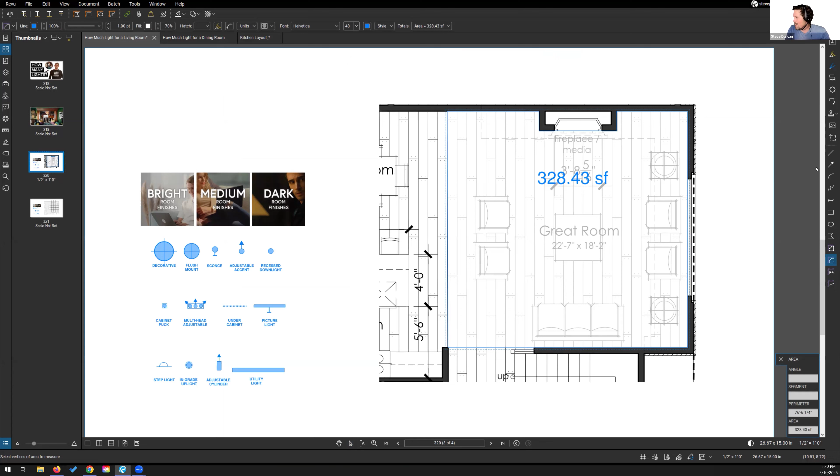So the first thing we're going to need to figure out is the square footage. So let's grab that. Okay, so we're at 328, and then we're going to have medium finishes for the paint and the wood and the ceiling in this room. Most living rooms kind of fall in this medium category. And then we're going to have 12-foot ceilings. That's something else that we need to know for our calculator. So let's head on back.

So we're already on living room. We said 328 for the square footage. 12 feet. So higher ceilings require more lights. We already have medium finishes, so we'll leave that the same. And then this light is 1,290 lumens. So let's see what 3 lights would get us to. So I think based on the layout, let's start with that.

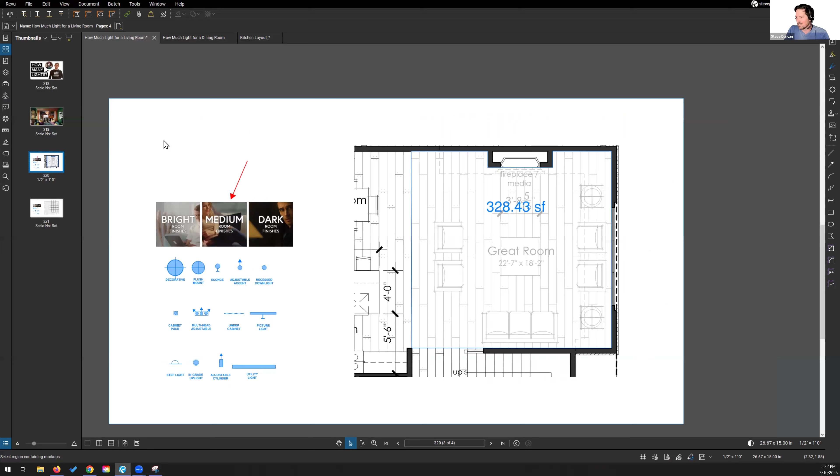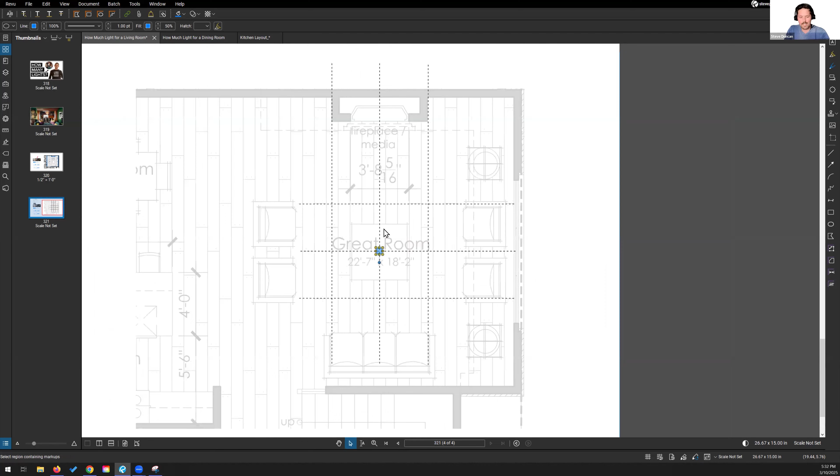This remainder of 1749 is something we can achieve with decorative lighting. We don't want to only have downlights. That's pretty boring. I'm going to go to this one. Okay, so I said we're going to have 3 lights. Let's think about laying these out. So let's go ahead and do one in the center. We want to highlight this coffee table. Some folks would choose to do a decorative light here. In this case, we're going to keep the ceiling kind of minimal.

Next, let's do a light near the fireplace. So we can wash the vertical surface of this fireplace with light. We're probably going to spend some decent money on nice finishes over here. And then finally, let's do one in line over here. We're probably going to have a piece of artwork on the wall, so this light will help to illuminate that.

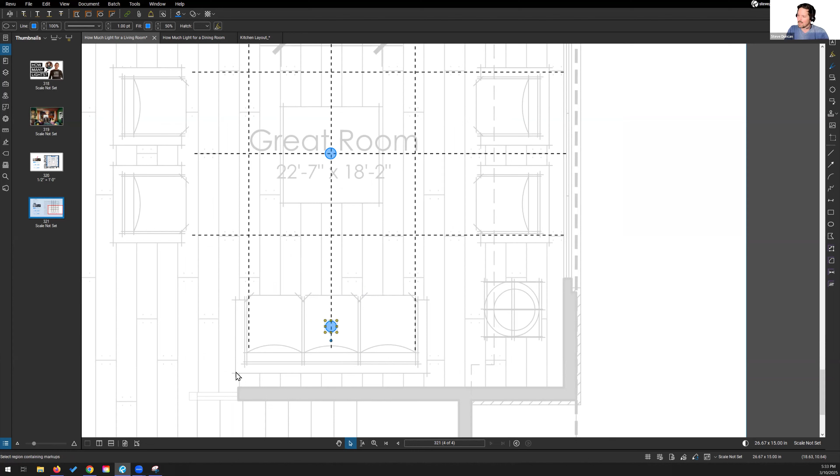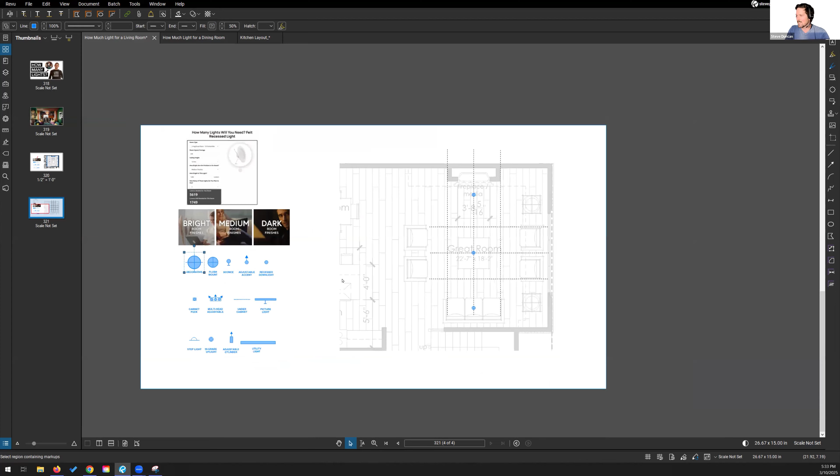And then the other thing we're doing is that we're allowing these chairs to kind of be a little bit less well lit. This is going to be a little bit brighter over here by the sofa, and that just gives people a choice with what kind of seating they prefer to be at. All right, so the 3 lights gets us part of the way there. We still need 1749. So what we're going to do is do some table lamps here and here.

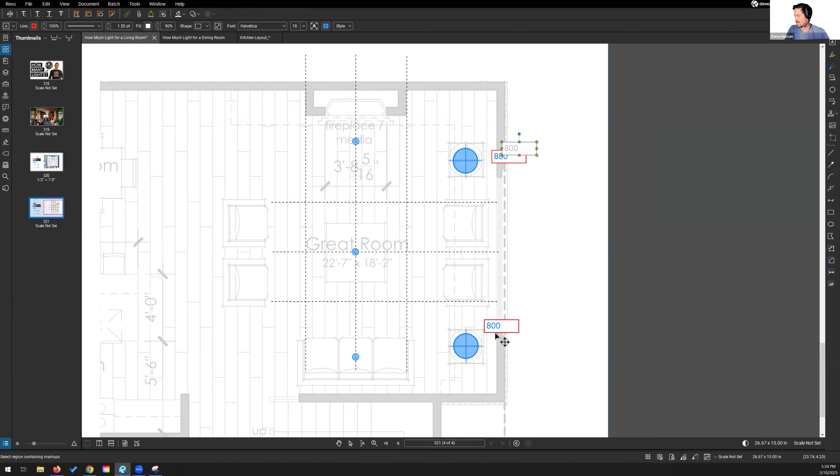And 1749, half of that is roughly about 800, which is a typical bulb brightness. So let's just assume that these decorative lights are 800 lumens. And then at this point, I would meet with the architect and interior designer and homeowner to kind of decide together what the look is for these table lamps. And what we've done is we've kind of narrowed down the field of options, and we know that they need to be at least roughly 800 lumens each. All right, that's it.

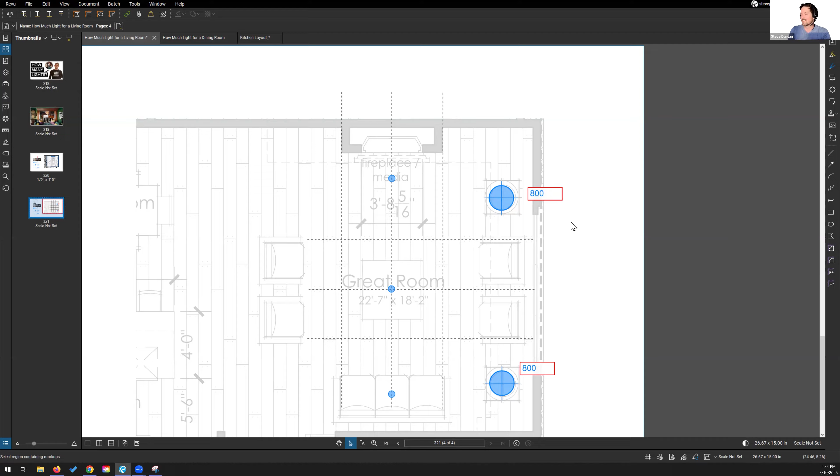We're done. I hope you got something out of this video and it wasn't too challenging, right? You'll be a pro before you know it.